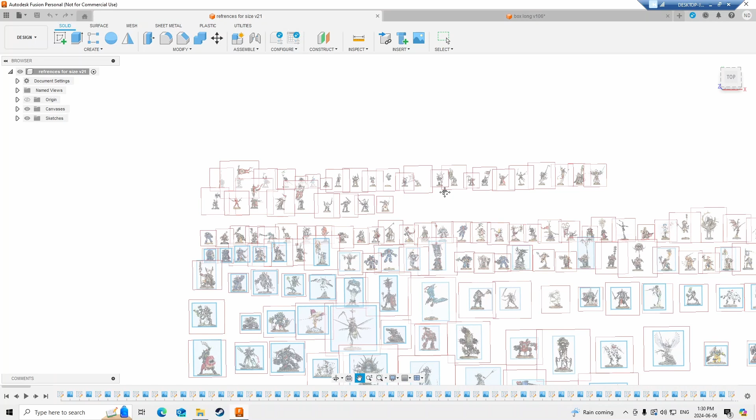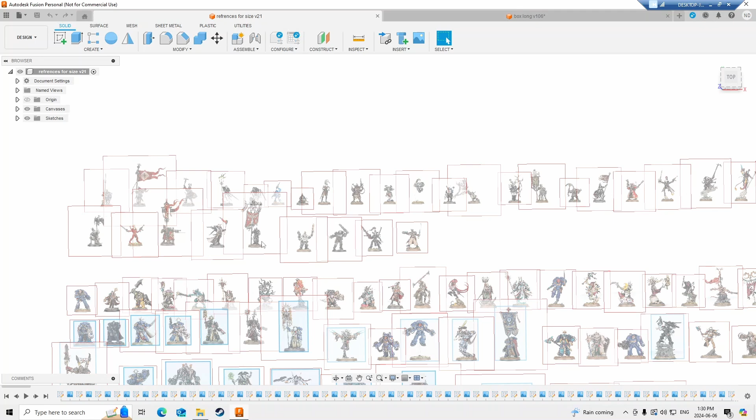First, I like to have some references. This is my reference file in Fusion 360, and as you can see, these are all Games Workshop models. I have them categorized into rows by base size - everything in this row is a 25 millimeter base, this row is 28 millimeter, then 32, 40, 50, 65, 80, and I believe these are 90s.

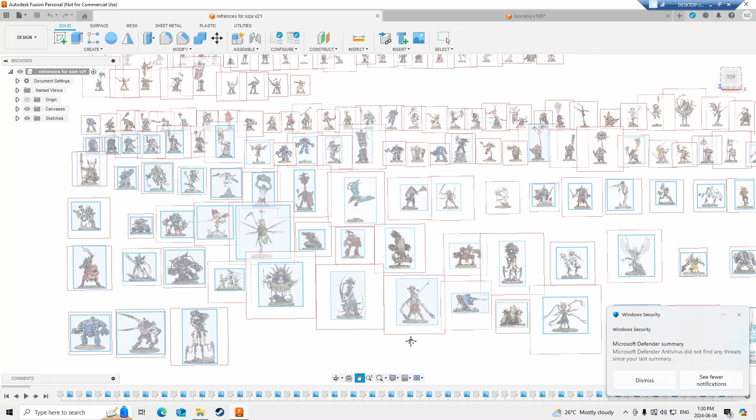I've just completed all of the 65s, so I'll run you through the process with an 80 millimeter base. You'll see why the base size is important as we progress through the design process.

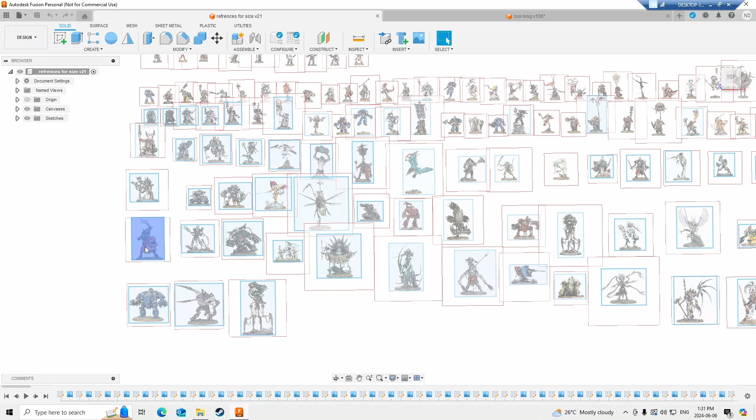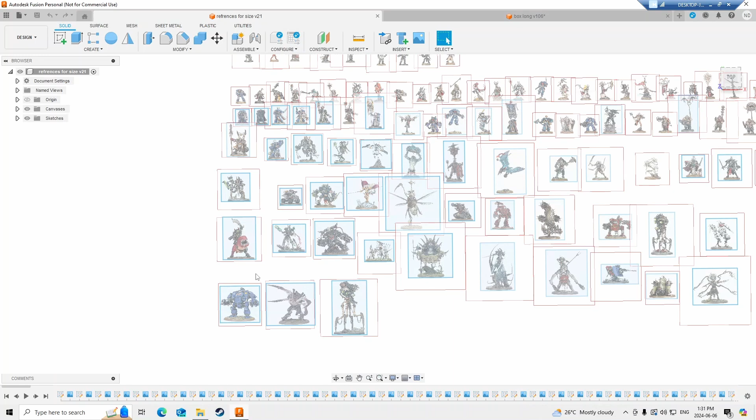I like to work with models that I have for at least my testing stages. Currently on an 80 millimeter base I have the Beast Boss on Squigosaur, and the Putrid Blight Hauler. I could do either, but this one's a bit of a weird size, so I'll do the Squigosaur.

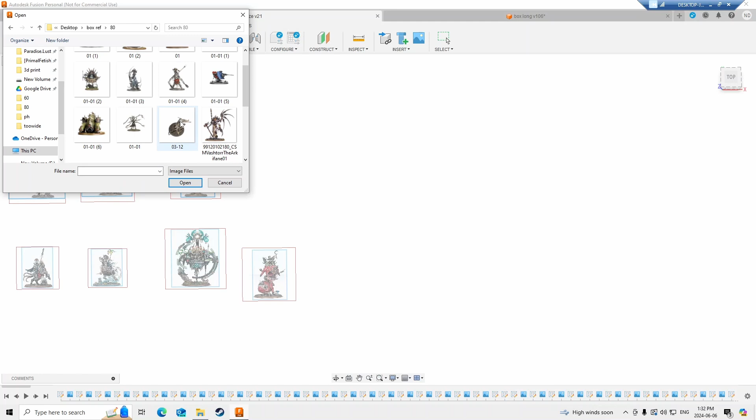So let me show you how - when you want to do a reference image in Fusion 360. I've grabbed all these pictures off of the Games Workshop website for reference. Here's the Squigosaur, and I'll place it roughly here, moved away. None of these dimensions are accurate at the moment.

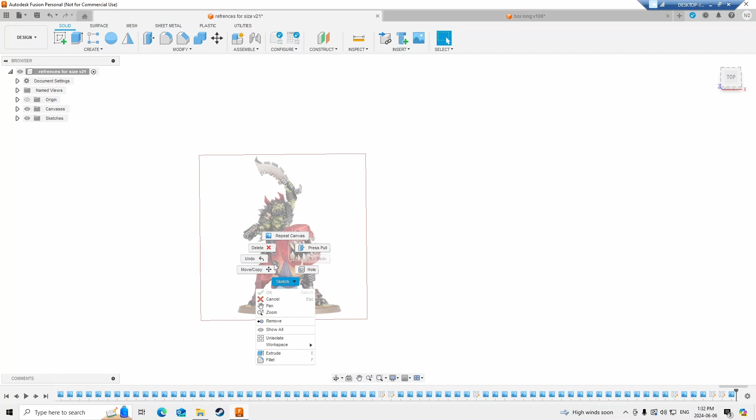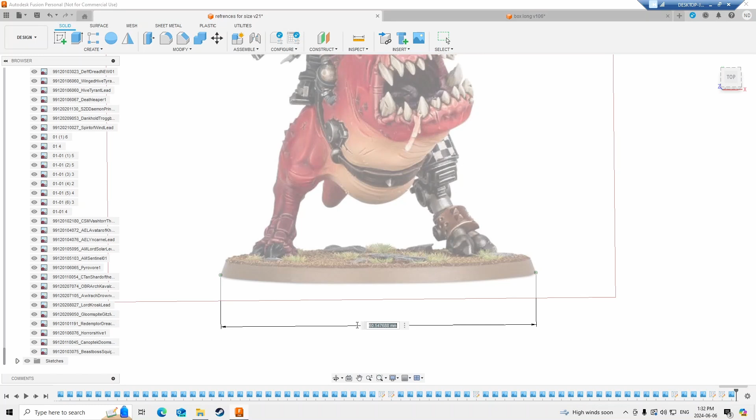So what you do is go to Canvas, find this which is the very last one, and calibrate. Since I know the base is roughly 80 millimeters, you go calibrate, and right now it thinks the base is 60 millimeters. So I'll bump that up to 80, and it grows the entire reference image to that size.

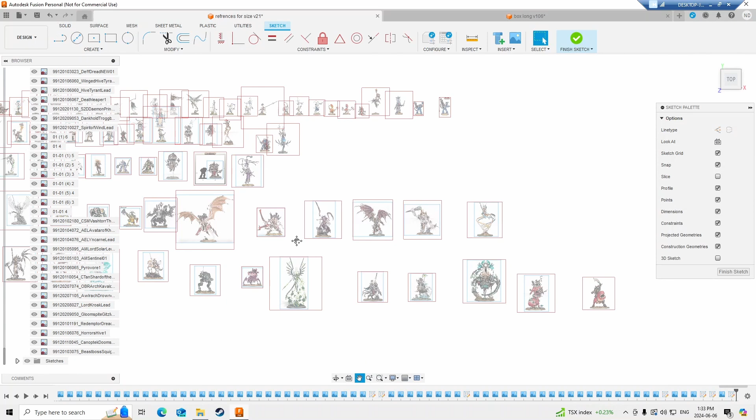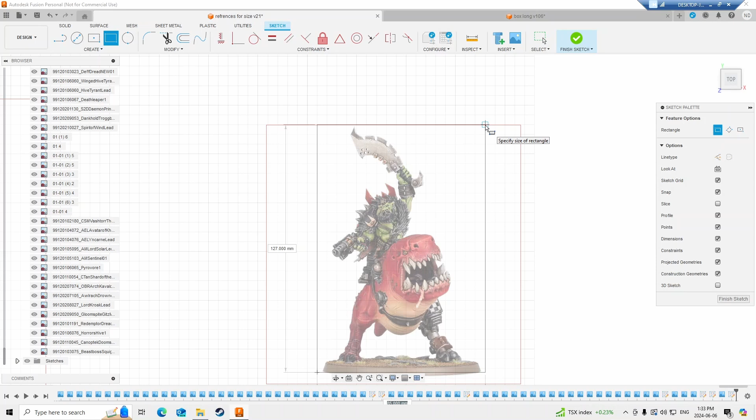Then I want to know what size I need to make the box around this guy. So I'll take a simple 2-point rectangle, starting at the widest point near the bottom - that will incorporate everything - and stretch it out to the widest point on the other side, and up above the tallest point, which would be the tip of whatever blade he's got.

Okay, so now I have a good reference size for what I need to make. I can look at this - it gives me my width, which is 85. I like to make them a bit wider, so I think I'll make it call it 95, just to be safe, and I don't want to overestimate either.

So I'm going to write that down in my notebook: 80 millimeters single, width will be 95 millimeters. His height is around 127, so let's make it 135, so we're not scraping the top of that blade. And then the depth I typically like to make the same as the width to start, and adjust from there if it's too deep or too shallow.

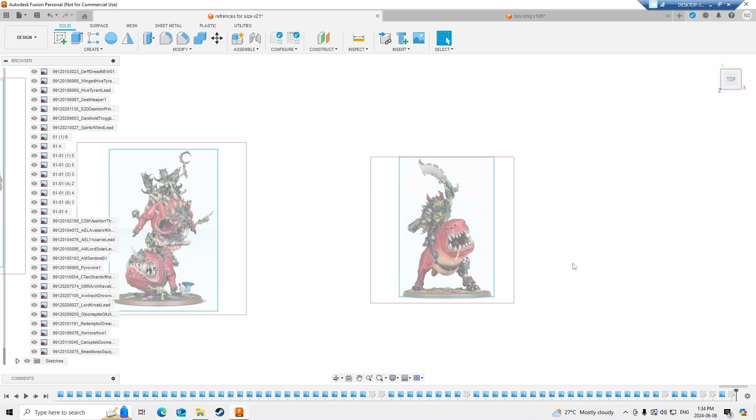So then we need to do a little bit of math. We're going to jump over to our next project, which is where I have all the different boxes that I've designed so far. You can see I have the 60.

Let's grab those and put it into frame. So that's kind of one of the larger 60 millimeter boxes. That shape is really only for models like the Winged Hive Tyrant, where it's still on a 60 millimeter base, but you've got these huge wings that spread to over 232 millimeters.

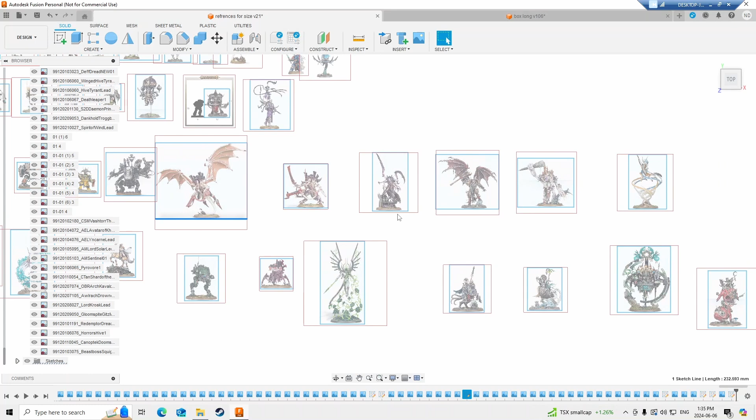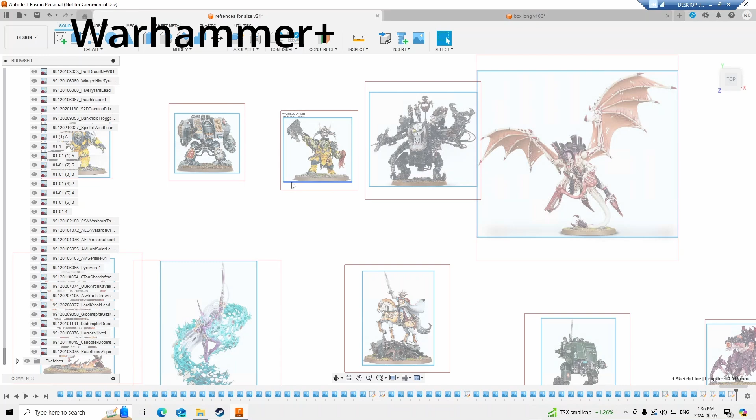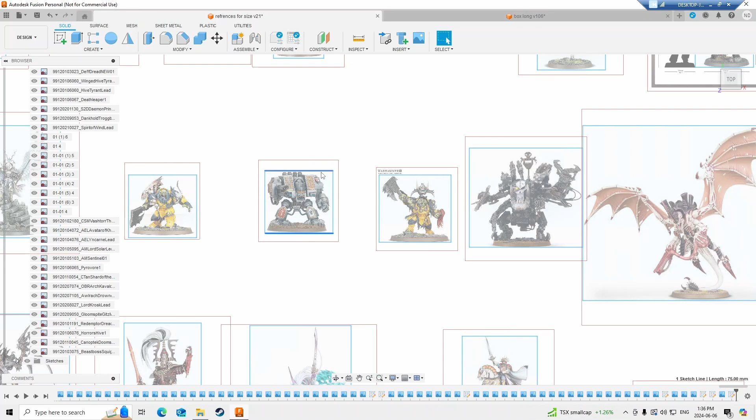So yes, you need quite the large box compared to the base size. I'll go with the normal Hive Tyrant because I can't remember this guy's name - the regular Hive Tyrant is only 112 at its widest. You have many others, like the first year Orc model, he was on a 60 millimeter base and he's only 80 millimeters. Same with Dreadnoughts, the regular old-fashioned Dreadnoughts were on 60 millimeters, and they're only about 75 wide at the widest if you're compensating for the arms and stuff.

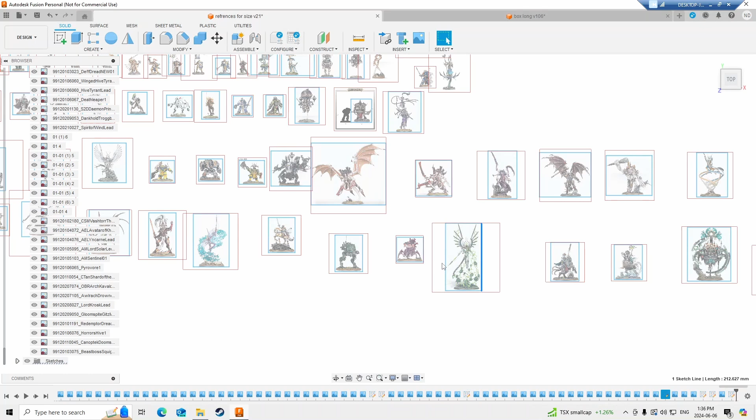So you have different size boxes that you need to make based on the base size you're working with. And in 80 millimeter, there's tons of different sizes. You have the Sentinels, and then you have the Void Dragon, which is a 212 millimeter tall model, compared to that's a Pyrovore, I think, who's only 78 millimeters tall. So huge variations on the base sizes and how wide they are compared to the base size, if that makes any sense.

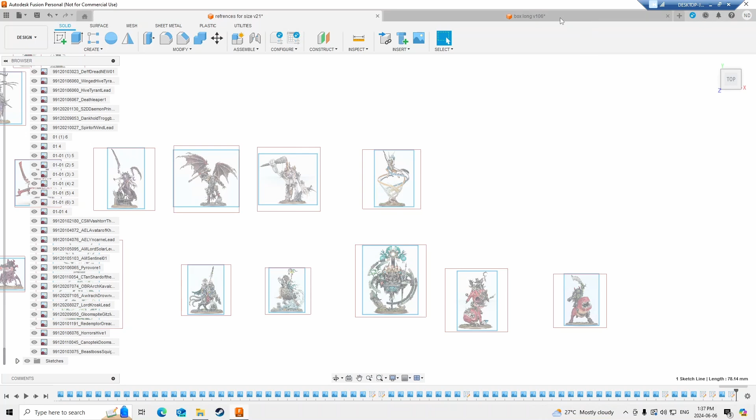So all of the boxes kind of follow the same pattern where the walls are the same thickness. I like to add each wall on the side, and the top is 1.2 millimeters, and that's kind of important because I'm thinking for 3D printing - that's 3 perimeters of a 0.4 millimeter nozzle, so it's 3 layers wide basically, and that's the economical part. I want this to be easy to print, low material cost, and any printer just about can do that.

So add 1.2 on each side for the width, so that's 2.4 millimeters. So 95 plus 2.4 is 97.4. Then do the same for the height, so that's 135 plus 2.4 equals 137.4. And then for the depth, it's a little bit different because the base plate is 2 millimeters thick, so it's 95 plus 2 instead of 2.4, so we have 97. So we have the basic dimensions of the box that we need to design.

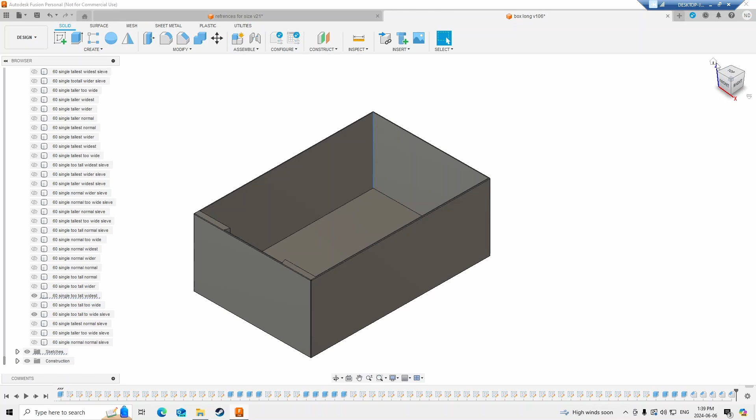Then we just have to add in this tray here, which I'll show you how to do in a moment. But at the same time, these are all one part of a two-part system. So this is the box that you would put your miniature in, and then there's a sleeve which then slides this box into here. These are not the equivalent boxes, so don't worry about the weird size discrepancy. But there's a box that fits inside that box so that it covers this face, adds a little bit of structure, and makes sure your miniature doesn't fall out. Good for shelf storage and everything. I'm really happy with the design of this and how it works, and I'm really looking forward to showing that at the end of this video.

So the math, I like to do the math for both of these at the same time, and the math is a little bit different. Because this dimension, the width, is the height dimension, I need to change up how I do the math just a little bit. So I take that 97.4 and I add 1 to it for the extra height, which just leaves a little bit of an overlap, making sure that the edge is covered. So that brings us to 98.4. And then for the other two dimensions, we need to add 4.2.

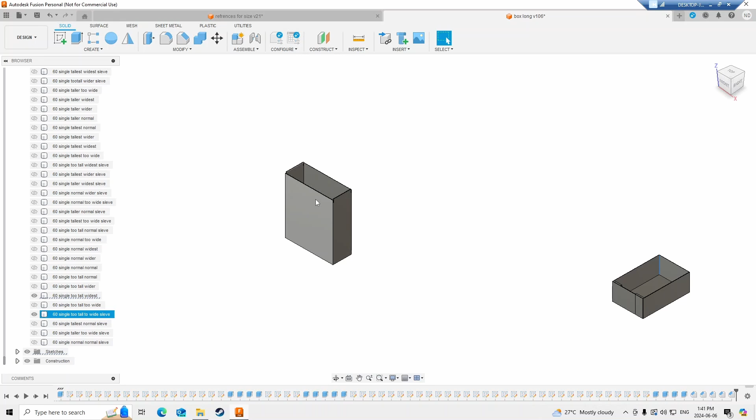That gives us, because these also have 1.2 millimeter walls, that gives us our wall thickness as well as just some tolerance so that the box fits in nice and smoothly and doesn't get stuck and doesn't fall out either. 4.2 is kind of the sweet spot that I found. So we have 137.4 plus 4.2 is 141.6. And then we have 98 plus 4.2, which is 102.2. Okay, so now we have both of those numbers.

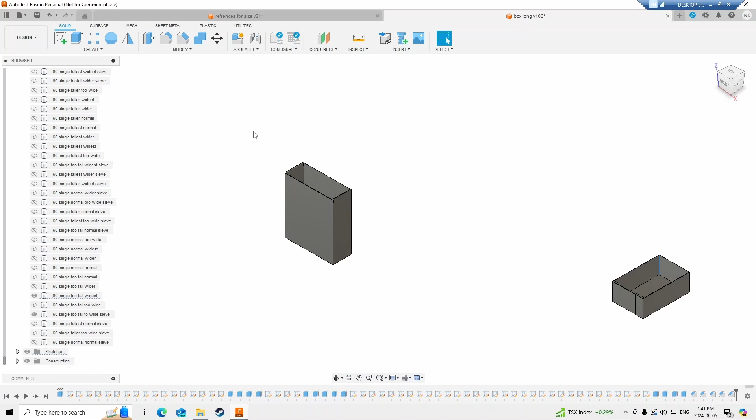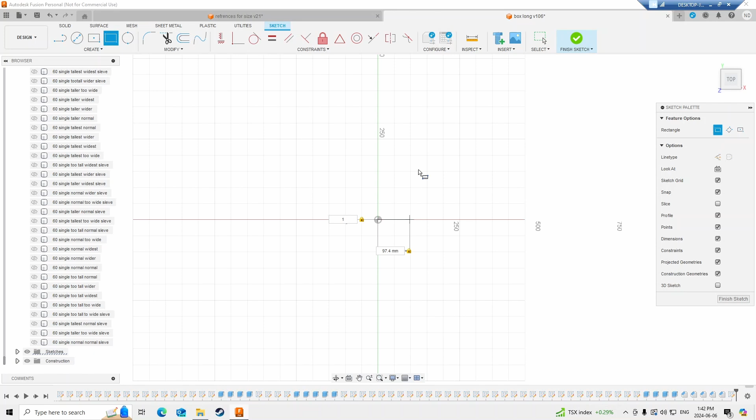Let's get these out of the picture and let's start our sketch. So first we're going to start off with just a 2-point rectangle to get our primary box size. So it is 97.4 by 137.4, and we're going to make that. And then we are also going to make the sleeve that goes with it at the same time.

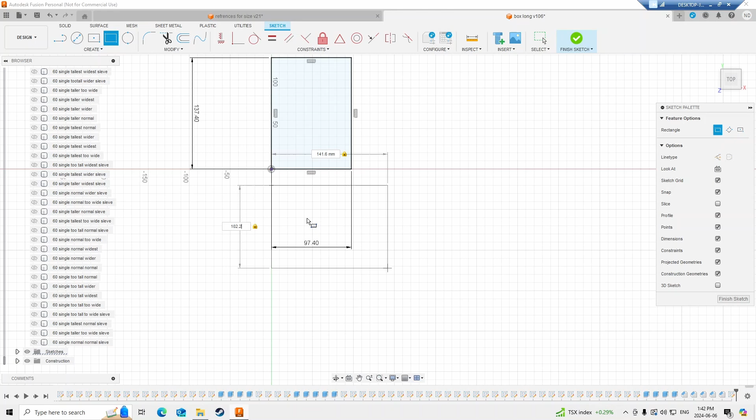So we need 141.6 by 102.2. And then we're just going to add a little bit more to the sleeve side because I like to have an open end on each end. So we're just going to add a 10 millimeter perimeter.

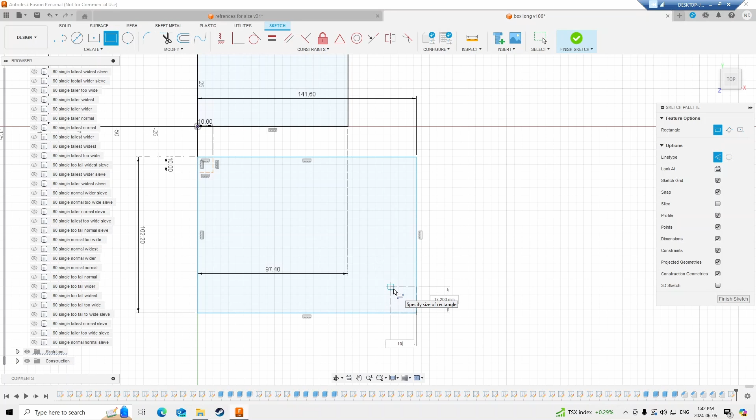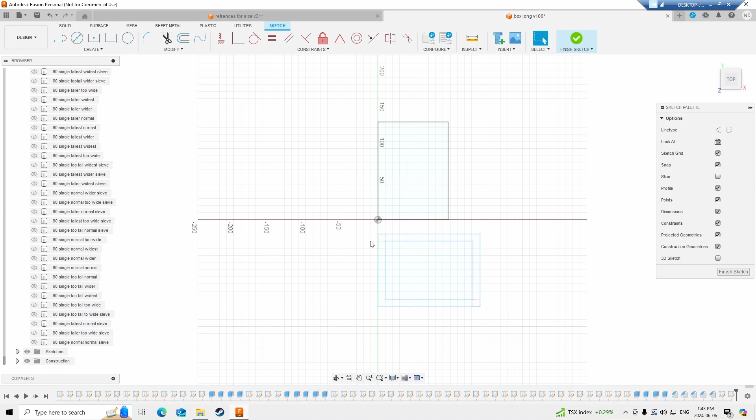I'm just going to make these construction squares, and then we're going to turn this off of construction, and we're going to do that, and that's going to make - this is going to be our solid. You'll see in a second. Okay, so now we have our sketches finished, or at least the first part of our sketches. We're going to grab each - no, I accidentally went into sketch again. I meant to hit extrude these, and extrude them both to 2 millimeters.

And then we have our bodies. So I'm just going to quickly label these. This is going to be 60 single, and I'm just going to call this squig, because this is just an example box. And I'm going to call this a single squig sleeve, so I know that they go together.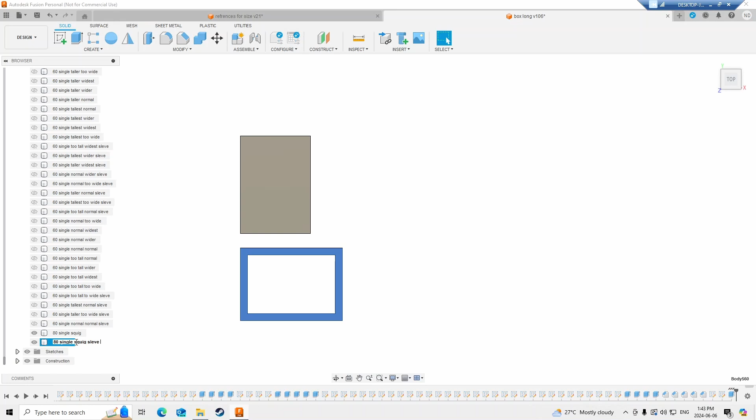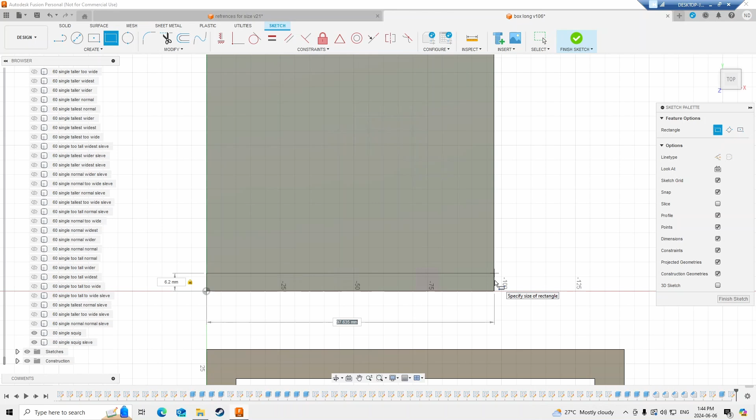So now we are going to finish the design on this. In order to do that, we need to build the walls and the bottom tray. So the bottom tray is 6.2 millimeters tall, and it's as wide as the box, which is 97.4.

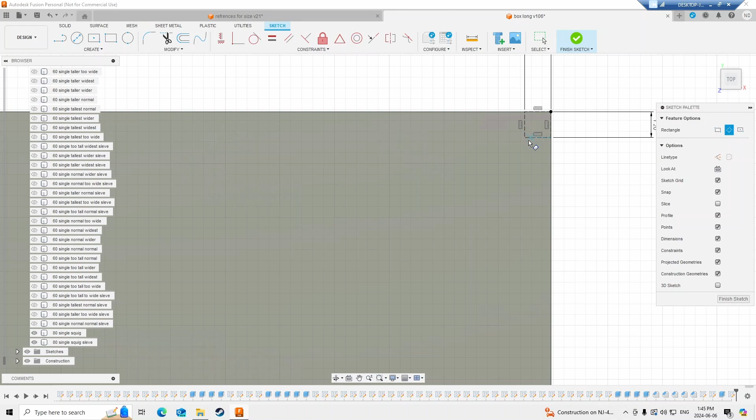And then I'm going to add in the walls. To do that, I just like to make two little construction squares at 1.2 on each of the upper corners. 1.2, 1.2. Then I'm going to use a 3-point rectangle to finish this. Take it off of construction mode. Grab that corner of that construction square, grab that corner of that construction square, drag it all the way down to the base here.

And then we are going to design the actual base tray in. I have a reference chart somewhere for what the actual base size fits. You can't just put an 80 millimeter base in an 80 millimeter slot, you need some tolerance. I've printed off sample trays and just written down what the best fit was, but I need to find that now in my book. 80 millimeter is actually, the tray size is 79.6 millimeters is what fits.

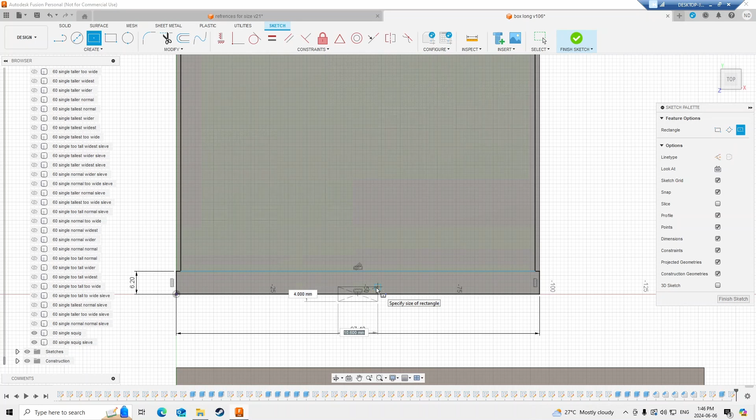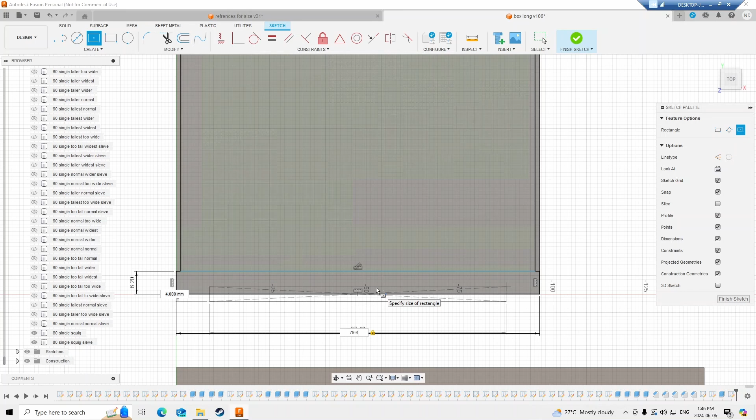So I'm going to take a center point rectangle. I'm going to find the middle of the bottom of this box. I'm going to go 79.6 is what I said. I'll have to work on that memory thing. It is... yeah, 79.6. And this is going to be 2.4 to give us that 1.2 millimeter wall, basically. And then I'm just going to ignore that part.

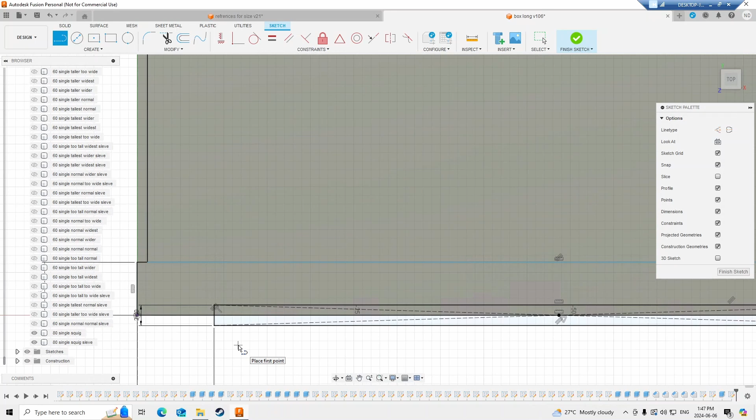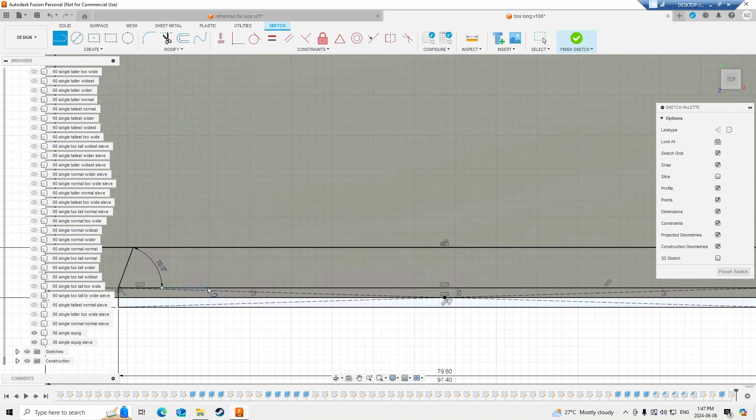And then we need to add in the bevels, because the Games Workshop style bases, at least, are beveled. I've done testing in the past, and I know if I just drag this up all the way to the top, and I change this angle to 70 degrees, and I just clip it to here, that's going to give me a good fit for the base. It's roughly that angle, it might be a little more, a little less. I'm just going to do the same on the other side. So 70 degrees, clip that to the top of that.

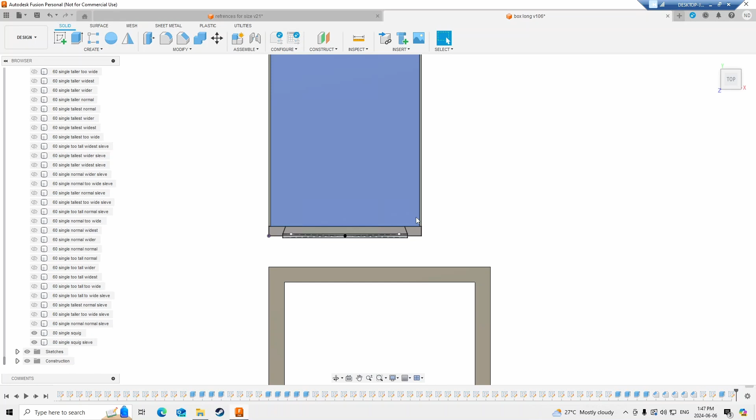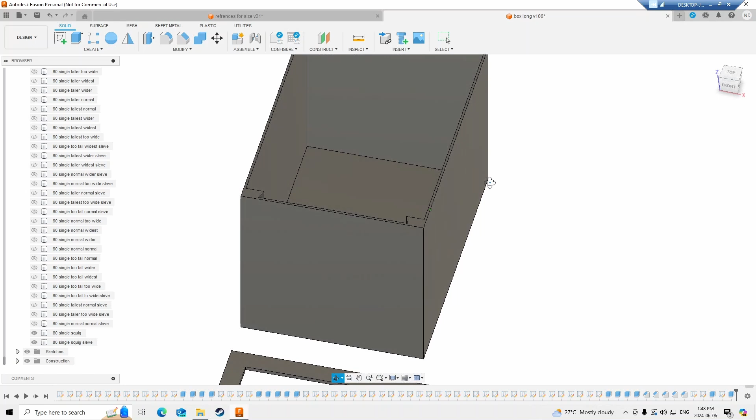And we're going to finish this sketch. Now we're going to extrude this whole thing into the box. So I need to extrude it to 95. We're just going to grab this piece, this piece, this piece. In the bottom here, 95. And there we have our rough box, which internal dimensions we have 95 by 135 by 95. And then external dimension is going to be 97.4 by 97.4 and 137.4, which is exactly what I was estimating.

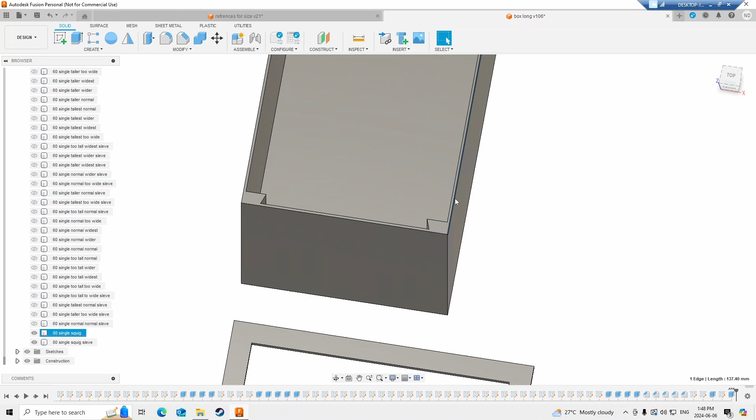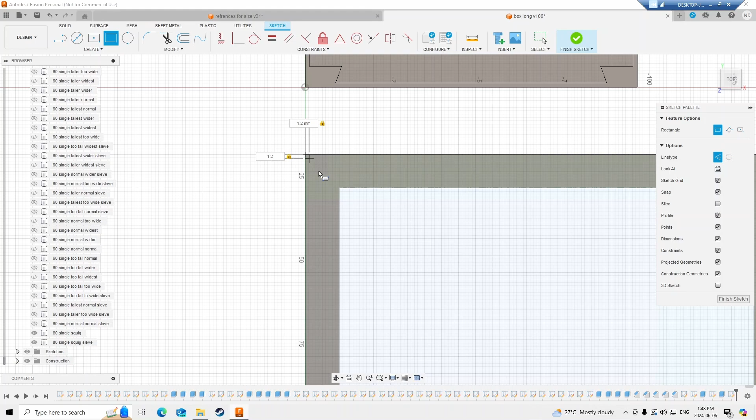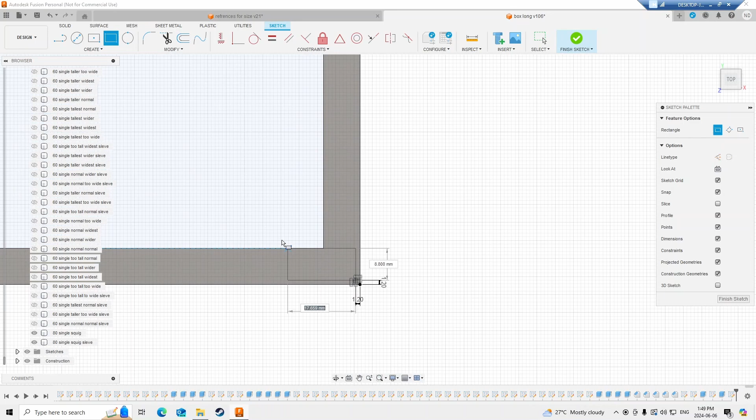Now let's build the rest of the sleeve. We start off with just giving it that 1.2 millimeter wall, and we do this the same way I did it on the main box. So just grab the opposite corners, put a 1.2 millimeter construction square, and then just grab the outer corner of that and link it to the outer corner of the other one. That gives us our nice 1.2 millimeter wall.

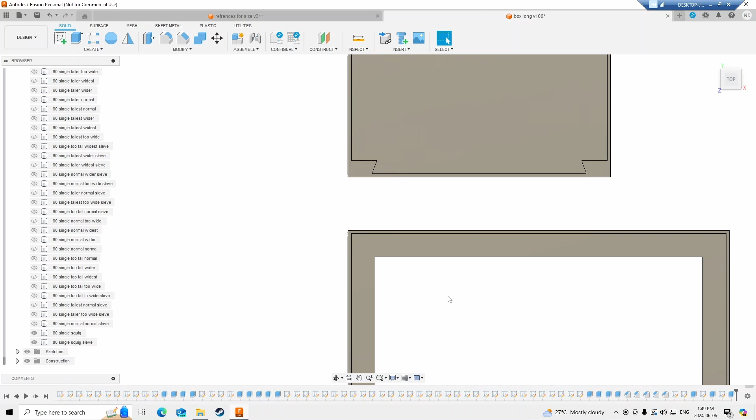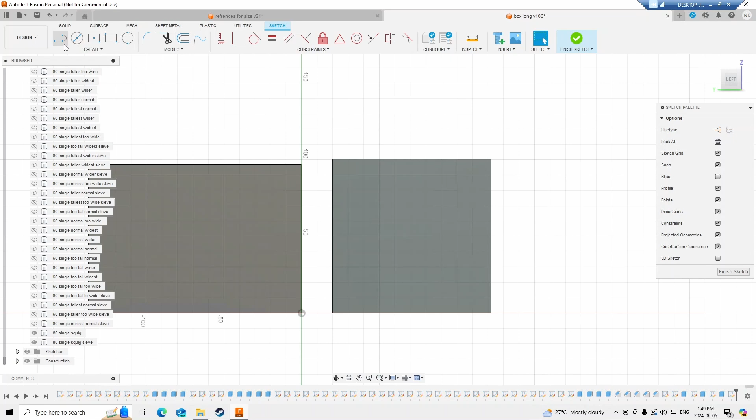Now I'm going to extrude this to 98.4, 98.4, and that's going to give us a sleeve that will fit this box. There's still a little bit more work to do on the sleeve, so that there's a little latch mechanism I like to build into it, and I like to add these little cutouts to give the latch a little bit of flex.

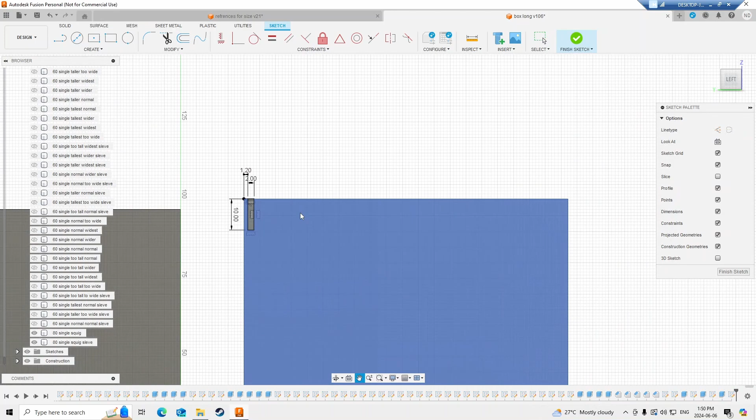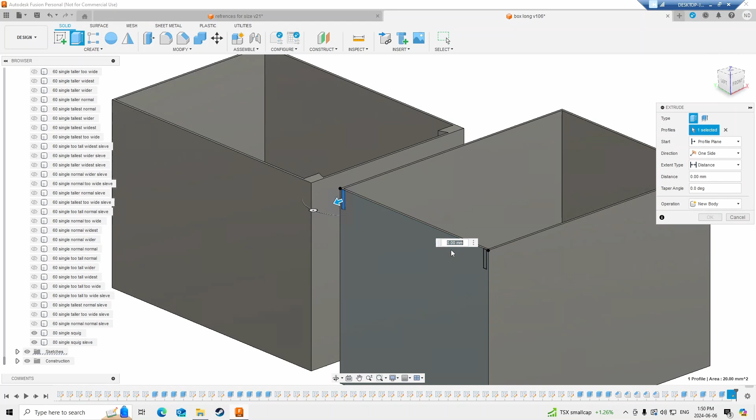So I want to go 1.2 for the thickness of the wall. Let the computer catch up, and then I'm going to do a 2 by 10 millimeter slot. I'm going to do the same on the other side. 2 by 10. Finish this sketch. And I'm just going to cut these out with an extrude. I'm going to choose extrude to object, this wall. It's going to cut those two slots.

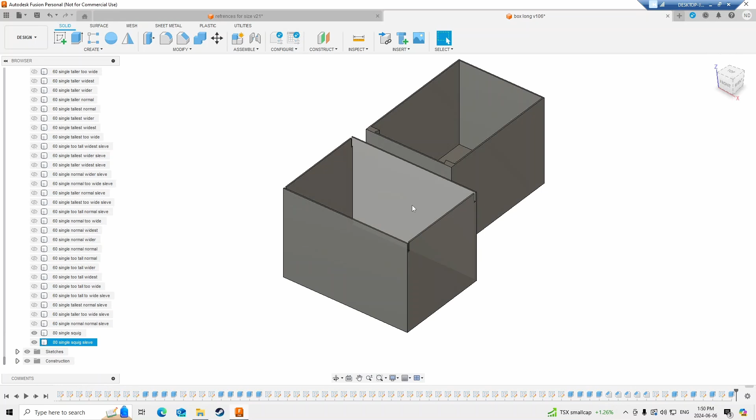So now we have a little bit of flex here and a little bit of flex here, because that's how the box is going to slide in. The top and the bottom are going to be these two walls. But now I'm going to build in the latch mechanism, which is very simple. I'm just going to grab these two ends. I'm going to add 4 millimeters to them.

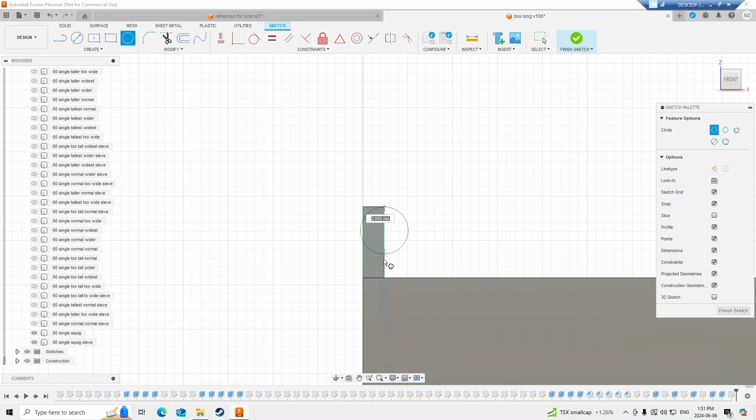And then I'm going to add a sketch on each one of these little tongues I just made, and grab a 2-point circle. I'm going to extrude that to 4 millimeters, and I'm going to do the same on the other side.

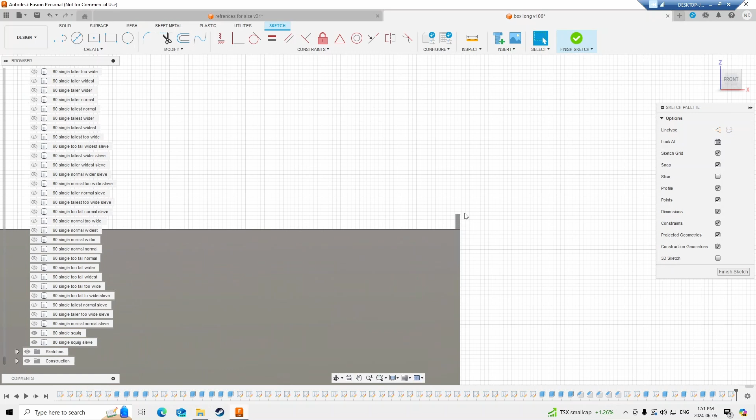No, what am I doing? Sketch. It's going to jump me back to origin. I don't like that it does that, and I don't know how to make it stop. And we're going to do the same, 4 millimeters.

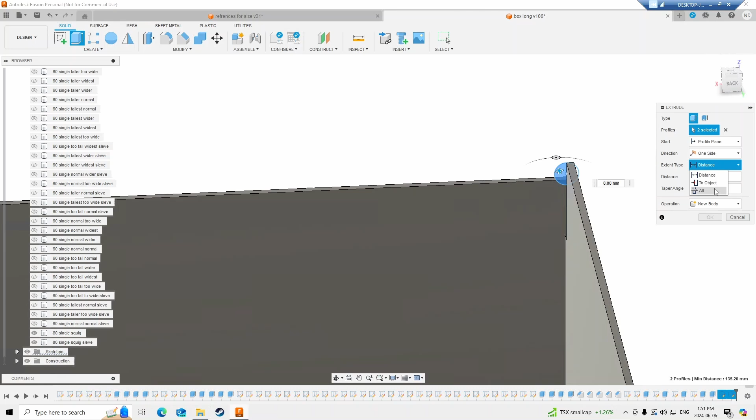I'm going to finish this sketch, and then we're just going to take those two inner parts of the circle I just made, and we're going to extrude these to the other side of this piece. And there we go, that makes our simple little latch mechanism.

It's not too hard to get the box in, and it's nice and easy to get the box out, but it keeps it secure from accidentally falling out.

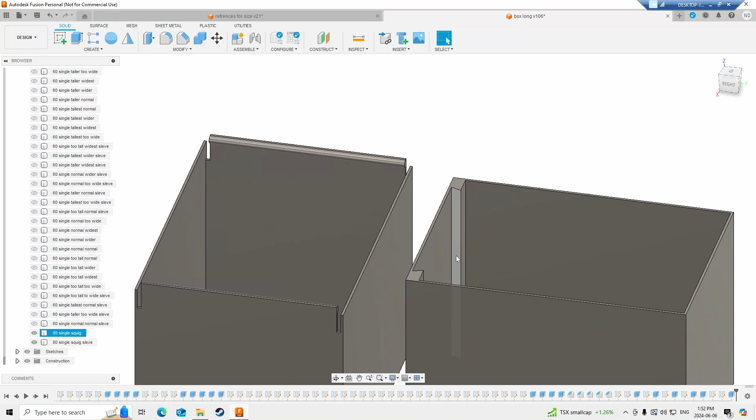Now the final step is to add a chamfer all the way around. So I like to grab this side of this box and that side, to grab the edge of there, and then we're going to - no, don't want that.

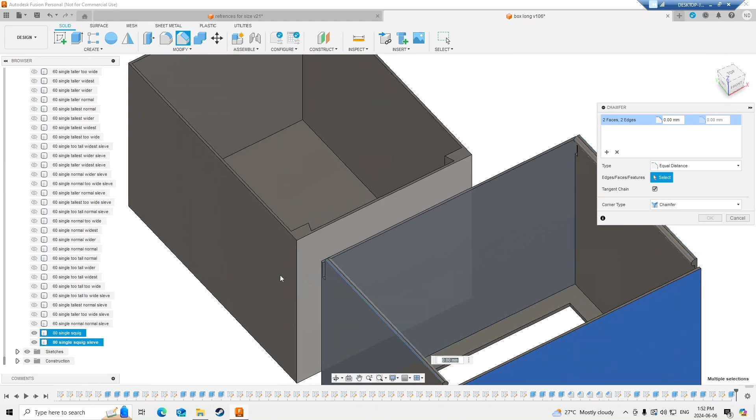We're going to grab all 4 sides of this box, and we're going to go underneath, select the base. This step is mainly for the base, to help with warping and elephant footing when it's printing.

You probably don't need it if you have a modern printer, but I have a first generation Ender 3, and the bed is a bit of a potato chip, so I have to add a chamfer to anything that's touching the bed, or I'm not going to get a good result.

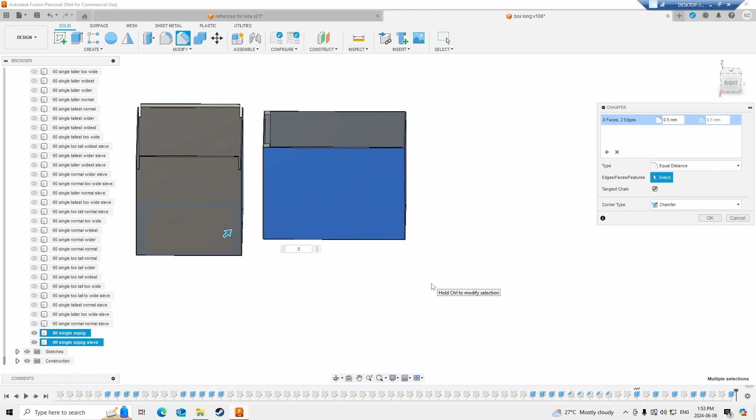So I'm just going to add a 0.5 chamfer, and it just cleans things up a little bit, makes them a little bit easier to work with.

So now we are going to export these for 3D printing. I'm going to select the box.

So we are going to go into - is it in G or D? I think it's on D, 3D All. This is just where I keep all my 3D printable stuff, and I need to add a new folder because this is the first 80mm box I'm making.

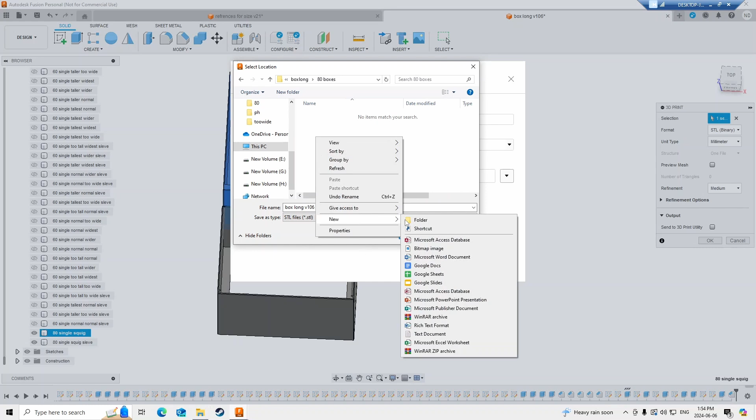Boxes - I'm going to go into here and just make a quick new folder. Squig test. And we're going to rename this as - come on - so, 80 single squig.

Save that as just an STL is fine. It's going to bounce us out.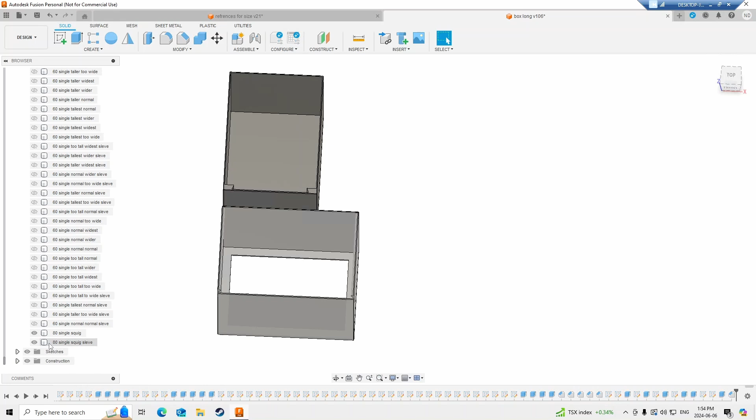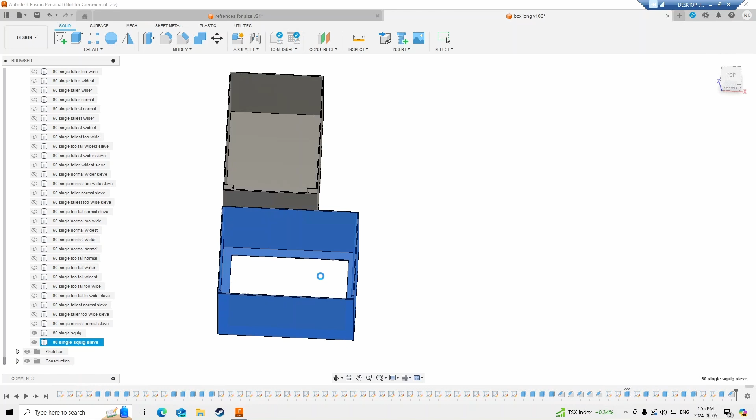And we are going to 3D print this. And we're going in the same folder, so 80 single squig sleeve, and save. And wait for the computer to catch up.

And then we're going to go to here. I'm going to go into Cura, and we're going to get these sliced.

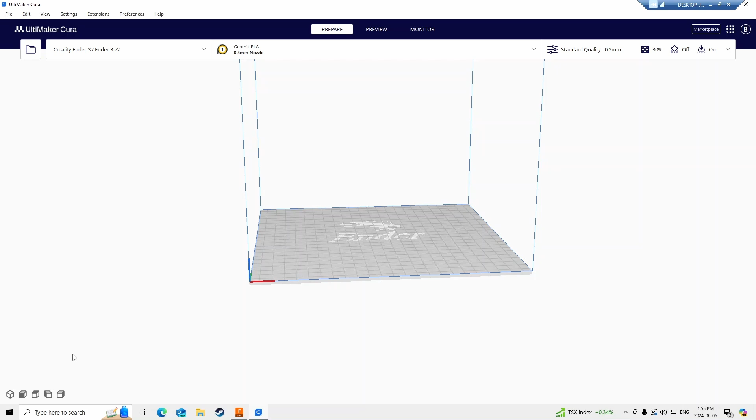So let's see, we're in 50 boxes. Need to go to 80 boxes, Squig test. So the box, it's going to be quite large, so I'm going to print them individually and just fiddle around with this a little bit.

I want to lower my infill because I don't need 30% infill. I probably don't even need 20%, but I'm going to set it to just 20 for now.

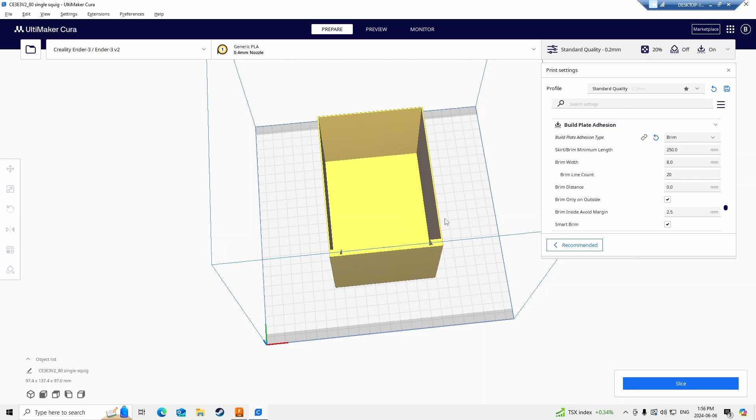And personally, I do have to print with a brim because, again, potato chip print bed. So if I don't print with a brim, one of these corners is going to lift and warp, and it's not going to work very well.

And we're just going to save this. This is my big G-code folder. I'll save that to a flash drive before I go to print, and then we're going to grab the sleeve as well.

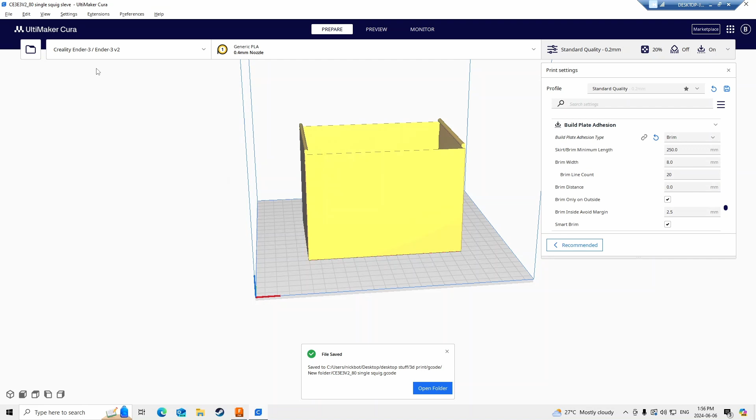And we're just going to do it the same way, and we'll do a preview, and you see there's that brim just on the outside so that it doesn't peel and warp.

And show you, open folder, and there they are. I'm going to put them onto an SD card, and then I will get them printing, and then I'll show you what comes out of the printer when it's done.

Alright, so here we have our finished box for our Squigosaur, and here you can see the two locking latches, and let's slide it out, and there's our fine great white squig - not Squigosaur - and he is held in there nicely by the base, as you can see.

He's going back in nice and easily, and we're going to put him back in the sleeve. It can be a little iffy to get it going the first time, and the obligatory shake test to show that he's not actually getting damaged.

I may - and of course he's upside down, but he is okay.

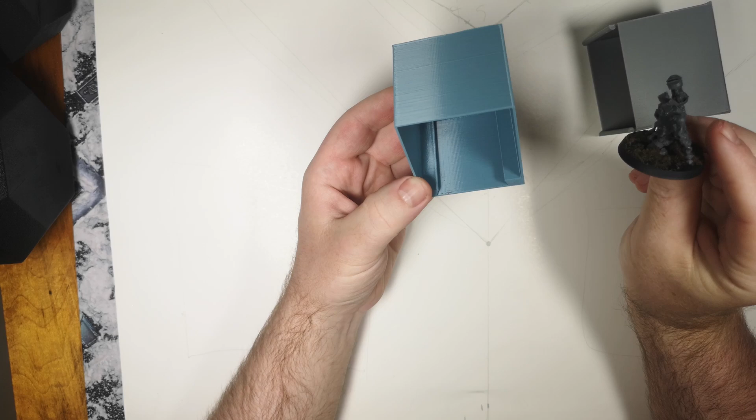And now I'm going to show off some other boxes that I've done. Here's a 40mm box for a single mini. I've got a Kharadron Overlord Endrinmaster, I believe, in there. He's in a sub-assembly at the moment, so he's missing his head and backpack. Yes, it can be a little tricky to get the box and the sleeve together if you're not used to it.

And here's a 50mm base with a Plague something - I don't remember what he's called, but he's a Death Guard character. And he's in his 50mm box.

And next we have, let's see, what do we have next? Here we have a longer box that holds multiple miniatures. This is holding the Desolation Squad, I believe, from the Space Marines line, the Nerf Gun Marines. They had to be printed a little taller because of their sergeant, who has his rocket launcher pointed right up in the air.

Next, we have a very tall box, but this is a double-row box, which holds 10 miniatures. These are 25mm bases, again Kharadron Overlords.

Next, we are going to show off a 32mm box, which just has a Plague Marine in it for now.